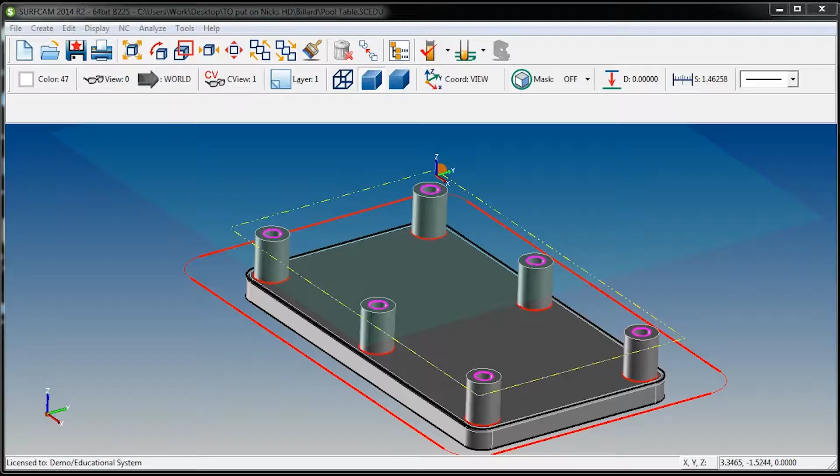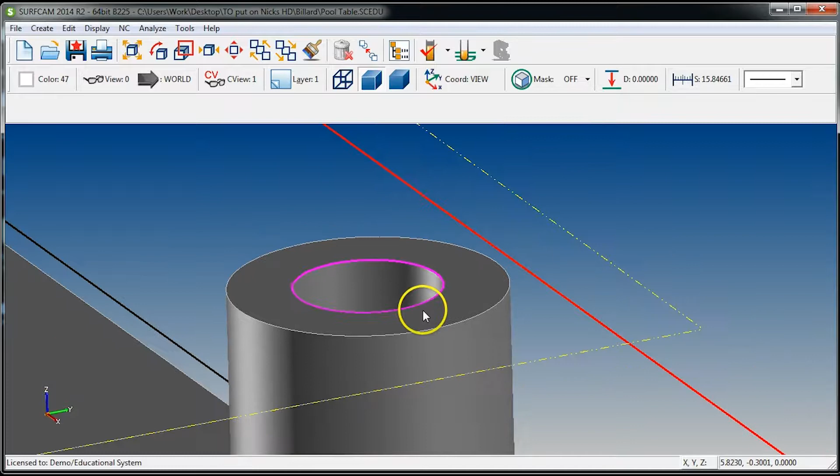You will be amazed about how fast this is going to take. Now, this method I'm about to show you also works if, let's say, this hole had a 30-degree chamfer and all you have is just the 2D geometry and you do not have surfaces, and all they give you on the print is just the major diameter of the countersink, and then they tell you to go 30 degrees down from there, then this is a good method. So let's go ahead and start and you can see what I'm talking about.

First thing you need to go is NC 2-axis contour. We are going to double click the very top of the chamfer, so this line right here. We're going to hit done. I'm going to select my tool. It's going to be a 1/2 inch end mill, tool 2. So I just hit 2 tab, 2 tab, 2.

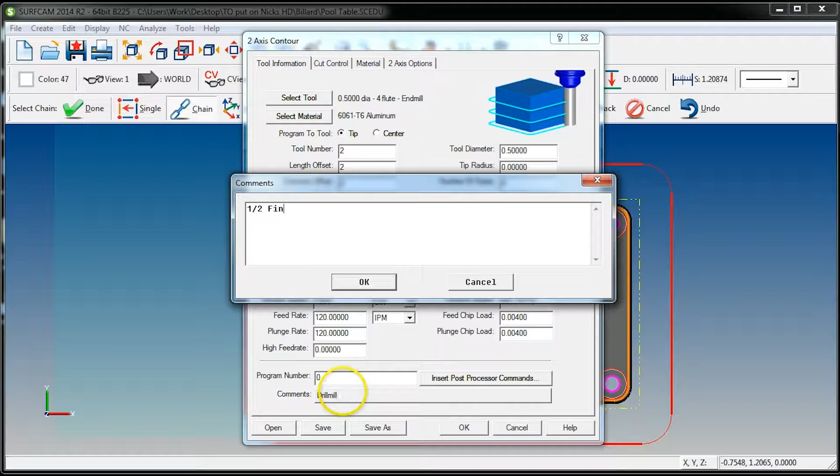We're going to go 7500, feeding 120, plunge rate of 120, and we're going to call this the 1/2 inch finisher. Hit OK. Alright, not too complicated. Go to taper angle and type 45 degrees.

Now, if you do not have this option and it's grayed out, then you might not have the license to do so. Some require, I believe it's a 2-axis advanced license, will allow you to have this. But again, most of you probably will have this taper angle.

So all you need to do is go to your Z depth and know what size chamfer it is. I'm just going to guess for now. We'll say 50 thou. And then this is important. You want to step over, because you're using a square end mill, about 2 thou. And we can look at the time on this after I get out of demo mode. I'll show you at the very end when I plug my key in. But for now, just plug in 50 thou, stepping over 2 thou at a time.

And anytime I 3D, to make the post a lot shorter, so when you post it out it's not as many lines, I like to change a few things. The main thing being your curve tolerance. So I'll make that 2 thou. And this mainly applies if you're using 3-axis cut, but for now I like to make my curve tolerance a little higher. And I'll show you how to check to make sure it's shortening your program or not when we start posting.

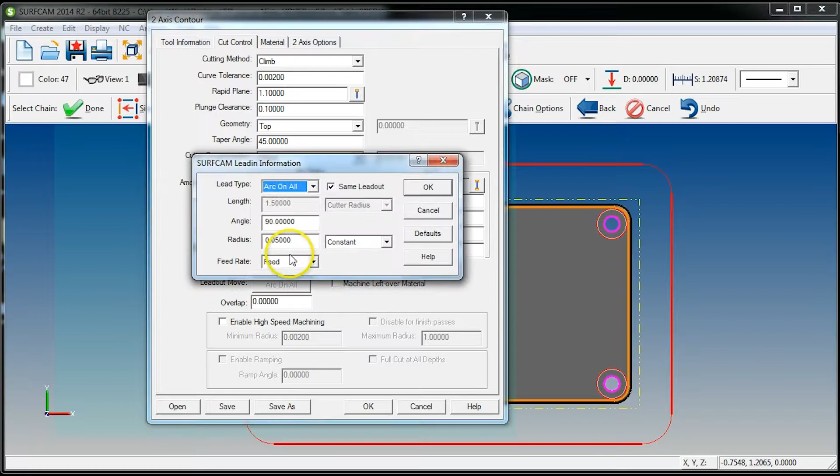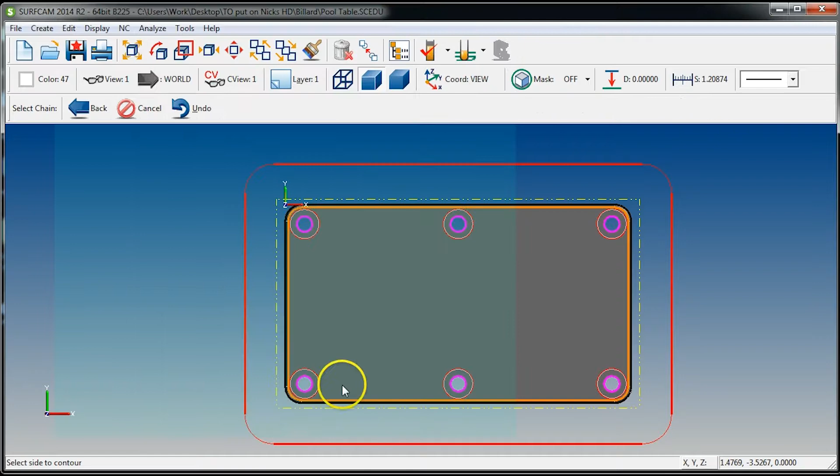The lead in move, we do not need to really lead in. If you're plunging on aluminum, or even steel for that matter, at 2 thou, it's not going to hurt your end mill. I mean, if you take a brand new end mill and then look under a microscope after you do this, yeah, it might burn up the tips a little bit. But for a small chamfer stepping over 2 thou at a time, it will be perfectly fine. We're going to hit OK. And then we want to select on the outside and hit accept.

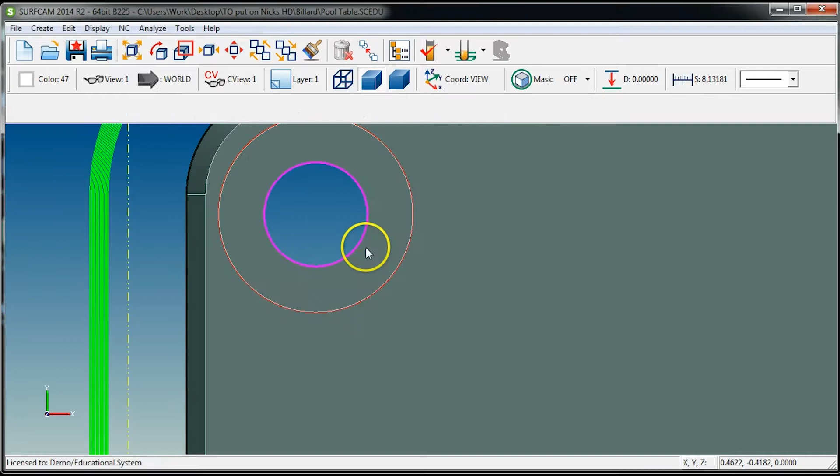So now I'm going to hit Control 2 and look at it in the front view. So as you can see, it's an exact 50 thou chamfer. Another way to check that is hit ZDE to analyze the distance from that line to that line. So yep, 50 thou. If you want to go a little bit beyond that, just to make sure that if your square end mill had a small radius on it, it would leave a weird step at the bottom. So let's go ahead and make it a little deeper. So we're going to say 60 thou.

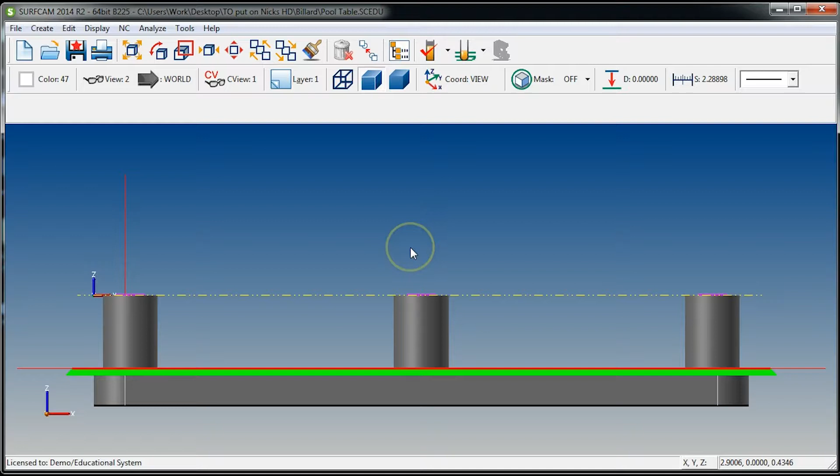And again, whenever you're drill milling, a lot of people will put a 20 thou chamfer. In Surfcam it may look really big, or in your mind it may look really big, but a 40-50 thou chamfer usually looks pretty good. Like this chamfer right here looks really big in our viewport, but in reality, if you hold the part in your hand, it might be really small.

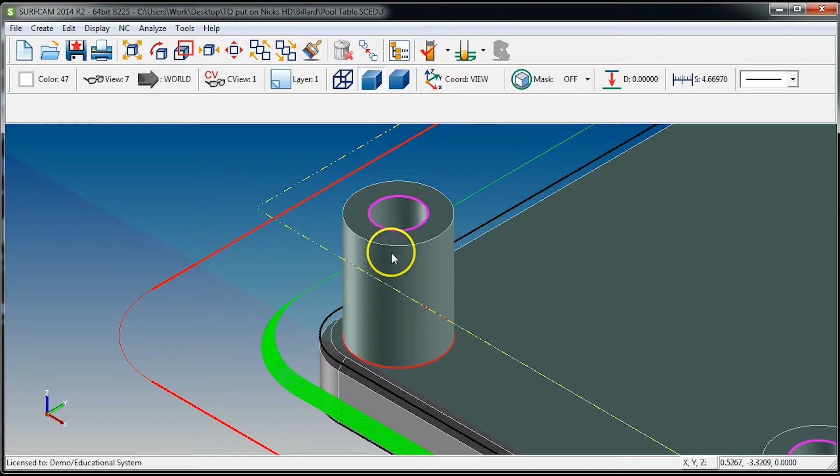So put a nice big chamfer on things, or radiuses, if you're making a part for yourself, a hammer or anything like that. It will always look better than a sharp edge or a tiny little 2 thou chamfer going around. Other than that, that will conclude our programming.

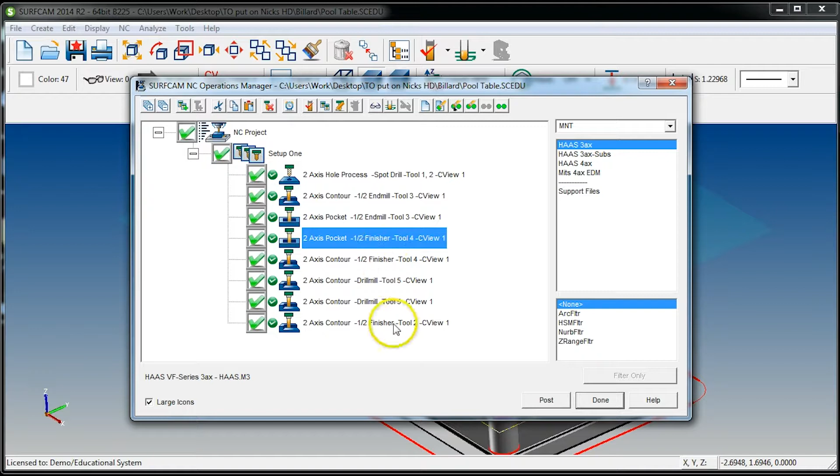And again, I like to personally set up before I start programming. That way I know exactly what tools I have in my machine. And as I can see here, our finisher needs to be tool 4, so let's go ahead and change that. Anyway, so I like to generally set up before I program. That way I know exactly what tools I have, where my 0 is going to be, and then I jump into programming.

And another reason I do that is because if I'm already set up and I have my rougher touched off and I get my roughing end mills already programmed, which this is in demo mode, it won't show it. But anyway, if I get my roughing program finished, I can go ahead and start running that roughing program while I'm programming everything else. So while it's pocketing out all of this material, which will take a minute, I can go ahead and start programming the finishing passes.

A lot of people that I've trained get in the habit of sitting down, programming the entire part, and then they start machining. Well, that's a lot of time wasted, if you do know what you're doing, you could be roughing all this out, and while it's running, you could be at the computer programming these finishing passes.

Because once you get in the habit and you're really fast at programming, I can program the drill mill standing up. I don't have to sit down. I mean, you can, but I can program that in 1 to 2 minutes. And while it's doing its finishing passes, I could program this drill mill, and by the time the machine stops, I already have the post ready to go for the drill mill cycle.

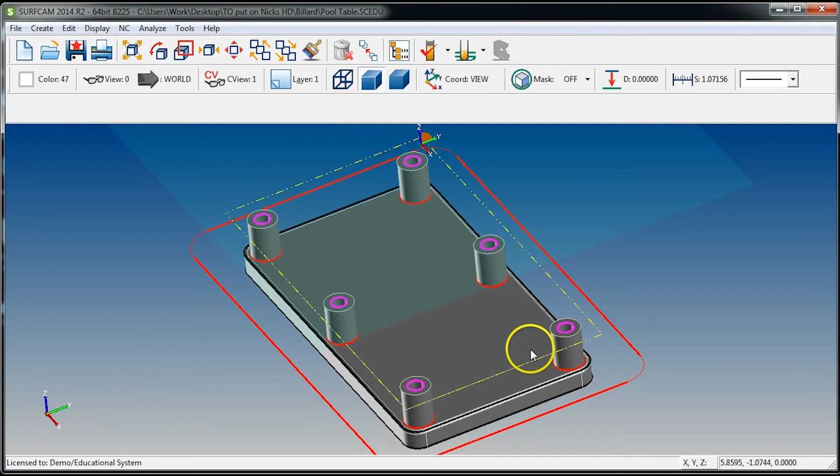You don't have to run the program and program at the same time. A lot of the times if you got one part, you might want to stand there and watch the tool run. But I've been running mills for 4 to 5 years now, and I'm confident enough with my toolpath to know, while it's pocketing all this out, that I can go in my programming room and be confident that my tool is not going to break or load up.

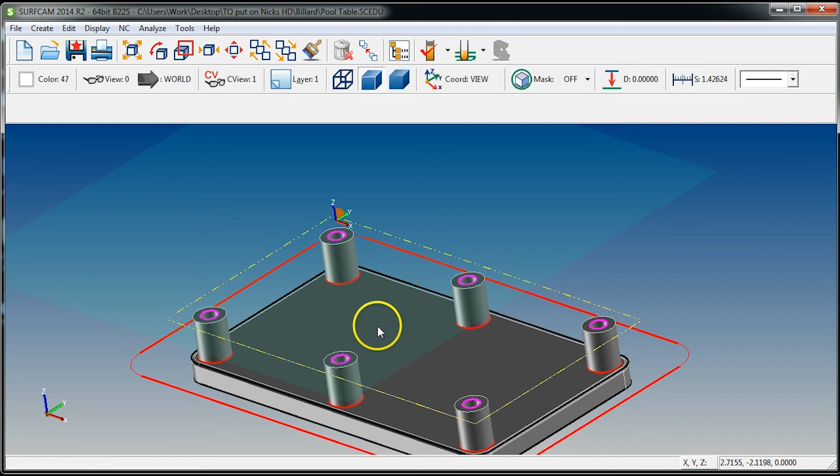Now, it can happen, the coolant can stop and then all of a sudden my tool loads up, but I've blown up enough end mills to know that once it's gone it's not going to be cutting anymore, so I'm not really too worried about that.

Anyway, we will conclude this video and move on to our last and final Surfcam video before we start running the part.